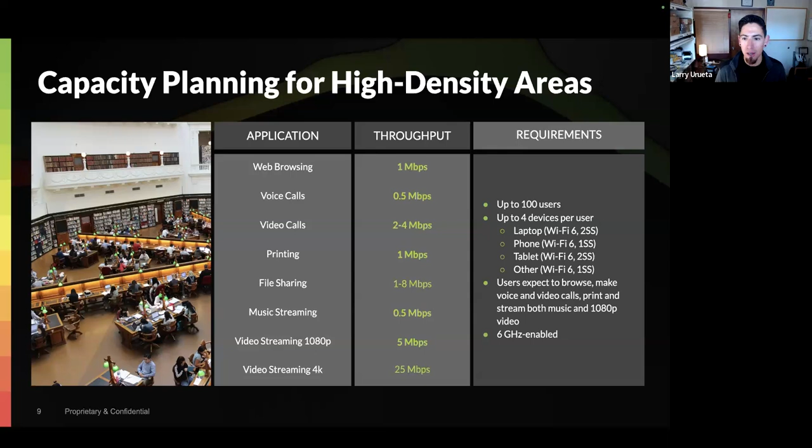Yeah, absolutely. I mean, you kind of already mentioned lecture halls. We see an influx during exam periods or during sessions and classes. Classrooms fill up with people, wireless devices. Maybe they're not always depending on the wireless for instruction, but as soon as that period is over, we also see the influx of all those devices disperse. It's interesting to see the wide variety of laptops, tablets, cellular phones, smartphones in some of those environments.

Absolutely. So with that Ekahau solution, it's definitely important to account for this. It's not just about the coverage. Capacity is going to be key, around capacity considerations, channel availability, device capabilities, and a number of different things that this application, Ekahau AI Pro, will allow you to account for, so that you can really simulate that environment and come up with a good design, making the best decisions based off that environment.

It allows you to be strategic, versus an alternative of just looking at a floor plan, looking at a map, and placing APs on that map. There's a lot more to it.

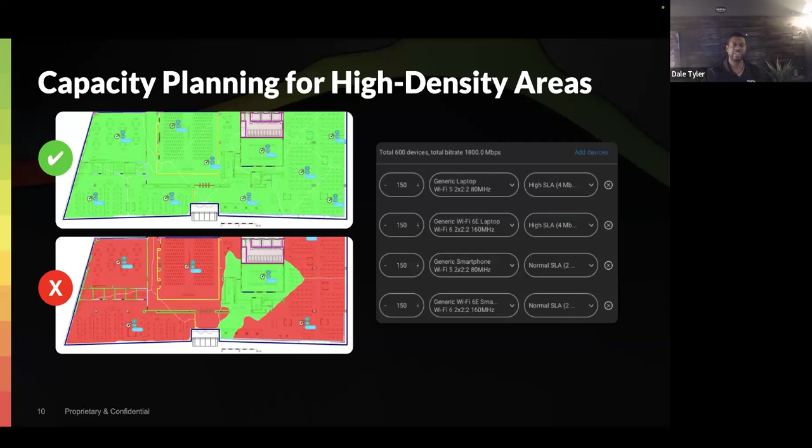Now, what we touched upon briefly is the many different types of devices. While it would be nice to have a set type of device capabilities up to date -- in this case we see many Apple devices, that'd be relatively easy to manage -- but the reality is not the case, especially in these higher ed environments. You have old Blackberries, old laptops, devices that might not be up to the latest standard, might not even be Wi-Fi 5 capable. So you have it all over the place, but you really can't discriminate and say, okay, this device is not allowed on the network. I mean, potentially you can, but you might have a lot of unhappy and disgruntled individuals when that applies.

So that's one of the things you can definitely count on in these environments -- the inconsistency of Wi-Fi client devices. So with that, what we want to do next is take a look.

We'll do a brief demo on the Ekahau AI Pro application. If you haven't seen it, this will be a good opportunity to see what it looks like, some of the considerations, how you go about accounting for some of these different requirements. So I am going to briefly share my screen here.

We will move this over and we'll take a look at Ekahau AI Pro.

So, I figured this was a good opportunity for me to kind of go back to school, revisit my college. I went to the University of Pittsburgh. This is actually the dorm that I stayed in at the time. Wi-Fi was not around in the dorms. So it's really interesting to go back and even see which room probably was mine, and think about some of these considerations, but more so from a Wi-Fi perspective today.

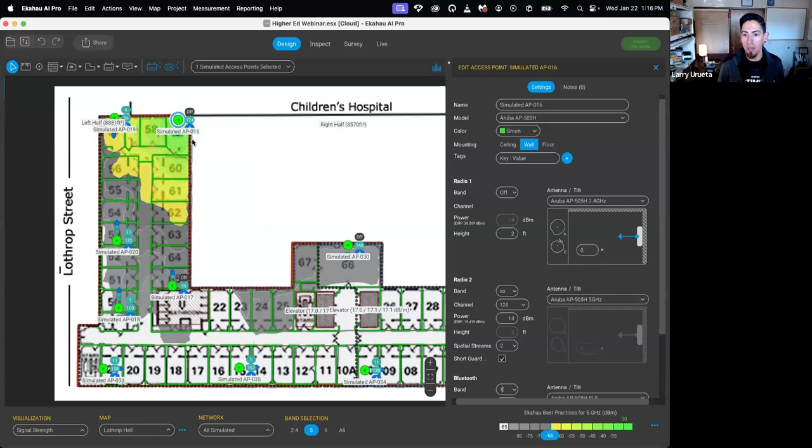Larry, are these pretty common these days that you see in dorm locations? Absolutely. Yeah, the ability for them to provide an Ethernet connection as well as a wireless connection is pretty valuable for the students. It gives them options. So we do see those in our residential dorms. Yep, and that's what I chose to go with for this particular location.

Now, obviously, we altogether have over 4,500 different AP antenna combinations to choose from. Maybe you want to go with the omnidirectional internal antenna APs, ceiling mounted -- those are options as well. So you get a chance to play around, simulate that environment, and understand what works best for your particular needs and use cases. Now, with this particular floor plan, of course, I scaled it.

Very simple to do. You take our scale tool, take a known distance, typically the longer the better. Then you left click and drag across that known distance and type in a corresponding value. From there, it's scaled for you thereafter.

So we have our scaling in place. Next thing you typically want to do is define your requirement areas, and this is going to be key. You do that using our area tool. In this case, we go to requirement areas, and actually, to help better visualize things, I'm just going to turn off our visualizations.

So in this case, you see I have a red half and a blue half. So what I've done was create two requirement areas across this floor. You could definitely do it as one, but you get a little more granular if you break it down. So with this, let's look at some of the considerations around an area.

I'm going to click along our area right here and choose edit area. Here's where you give it a name. I just called it generically left half, and I gave it a color of red. You have some options in here, really helpful for distinguishing between requirement areas so you can quickly see this is one area, this is another. It allows you to quickly see where the areas separate and such.

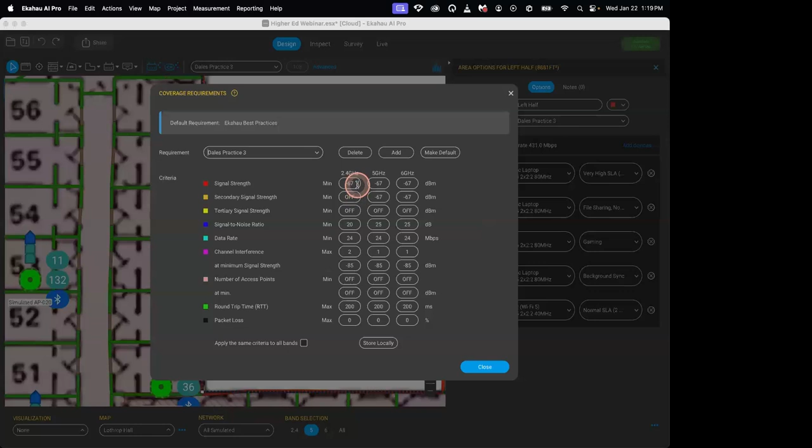So not a problem if you have Wi-Fi 6E or Wi-Fi 7 in scope, you can account for that as well. But this is where we start talking about capacity considerations: the number of devices, device type and capabilities, and the applications. You'll notice we have a column for each one of those.

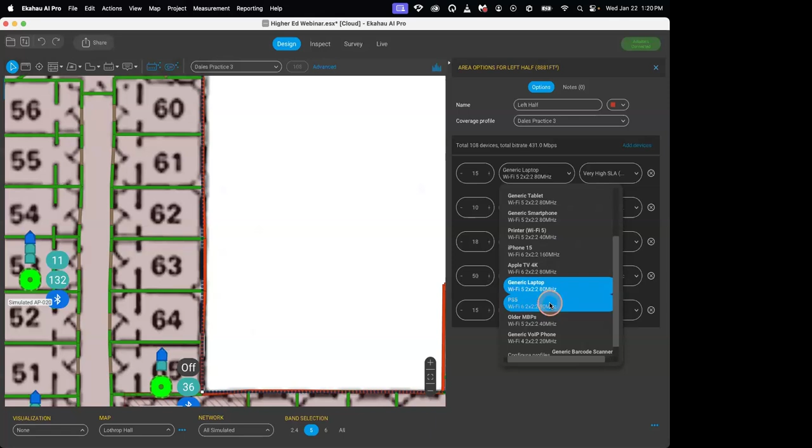Out of the box, we do have a number of generic items or devices for you — generic smartphone, tablet, VoIP phone — but also some outside of the generic, which are what I've created. Oftentimes it's a best practice to really simulate that environment as precisely as possible, so I've thrown in some Wi-Fi printers here. We have iPhone 15, iPhone 16, PS5 — you can't forget that — Apple TV. So a number of different devices and then the type of application.

Ultimately, when we assess or try to gauge what our airtime utilization is expected to look like, or capacity health, these are where you feed in those key criteria and values.

So now we could turn back on a visualization of primary signal strength, and we'll just go up here. Altogether, we do have 26 different heat map visualizations. This is going to give you a good idea how that Wi-Fi environment looks, whether it's these simulated access points or later, if you survey your measured APs.

So we go here. Now, again, we do have some areas where primary signal strength is not meeting our requirements, so we might want to address those.

So some of these simulated access points, again, we'll dive in and look at how these are currently configured right now, at about 2 feet height from the floor. These are plugged in, so vertically aligned. So we see that orientation right there.

But there are some options depending on the AP model. Maybe you want to specify ceiling mounted, wall mounted, floor mounted, or for some of those, maybe you want to account for a down tilt — often the case where you might be deploying directional antennas, external directional antennas and such. So you can account for down tilt, tweaking your transmit power levels, and channels. So a number of things you could do with these simulated access points.

Now, for this model that I chose, I'm just going to — let's just do it this way. So let's start placing some more of these.

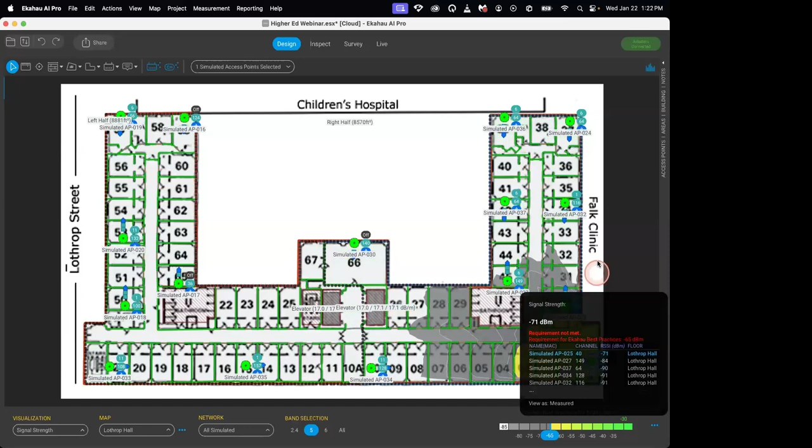Now by default this one is facing downwards because I copied that one. But now what we can do is take this AP antenna and move it back here. Let's suppose this is a wall jack AP, and we want to aim and direct it closer to, there we go, aim it that way, because we wanted to point down more into the rooms, not so much the hallway area. So we can aim and direct that.

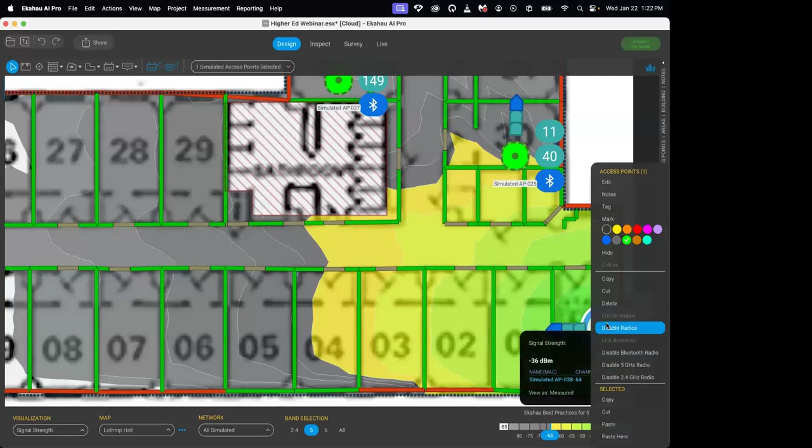Now I'll just continue this approach a little bit. We'll copy it, zoom out a little bit. Well, I have one right there, so we might be good for right there. Maybe we paste right here.

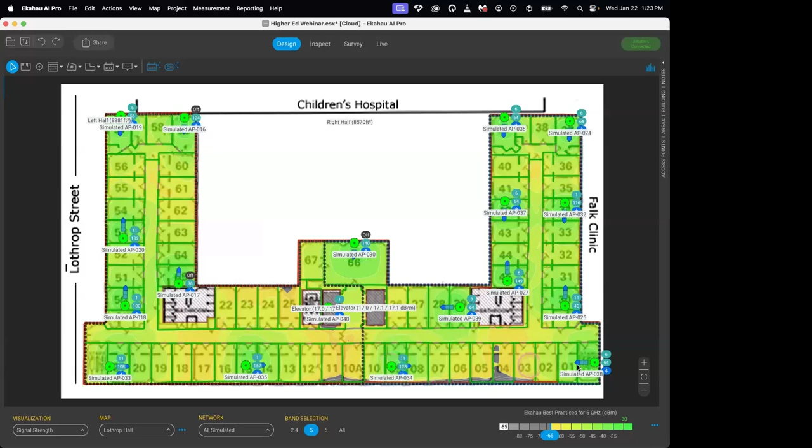And we take this one that already has the proper orientation I'm looking for, so we just copy right there and paste right here. As we look throughout coverage now, let's see, pretty much we have sufficient coverage. Maybe we want to consider moving this one over there from a planning perspective to address that gap, or maybe we just add another one. But you get the idea.

Now that these are in place, okay, these APs I did a copy and paste on them. So one of the things we can look at is network health. Network health is going to give you a very simple pass-fail indication showing you what areas meet your requirements entirely versus those that have at least one criteria that fails. So in this case we see some green, but we see a lot of red.

Now what we can do is take advantage of network issues. That's going to show us why our requirements aren't being met. So we do have these areas that are pink, where channel interference isn't meeting our requirements, but also we have these areas where secondary signal strength is not meeting our requirements.

Now if we want to take a look at the capacity health, we can go right here, and this is going to give us another legend we can take a look at. Now in this case, why is my capacity health showing that it is okay? Let me see. But actually, yeah, my channels do look different here. So maybe you are okay from a capacity health perspective.

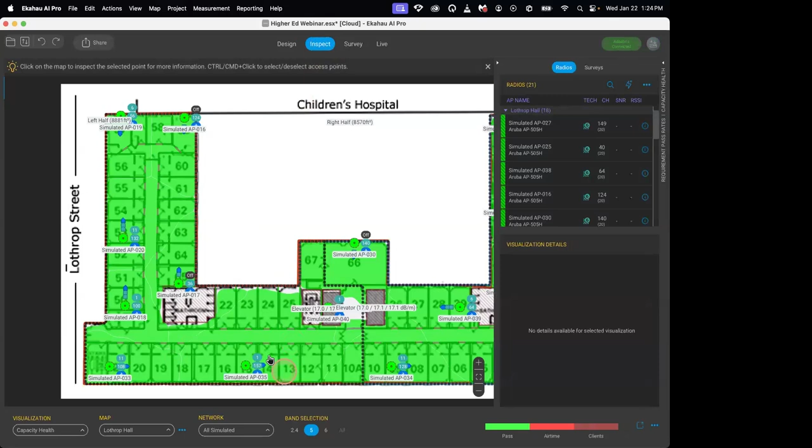But one of the things we can do is go to the inspect workspace and do some inspection. So this allows us to click throughout. So yeah, we do see confirmed in here, visualization details, airtime 14% over here, 18 clients, 16 clients. So again, it comes down to the number of devices, device type capabilities, and the applications that you have in place.

Now this is a manual approach that I took as far as placing the access points, but we also have a feature called AI Auto Planner. So maybe you want a little bit of assistance as far as placing these APs for you, with the ability to thereafter relocate those APs, make adjustments, add, remove some. You do have that option and capability also.

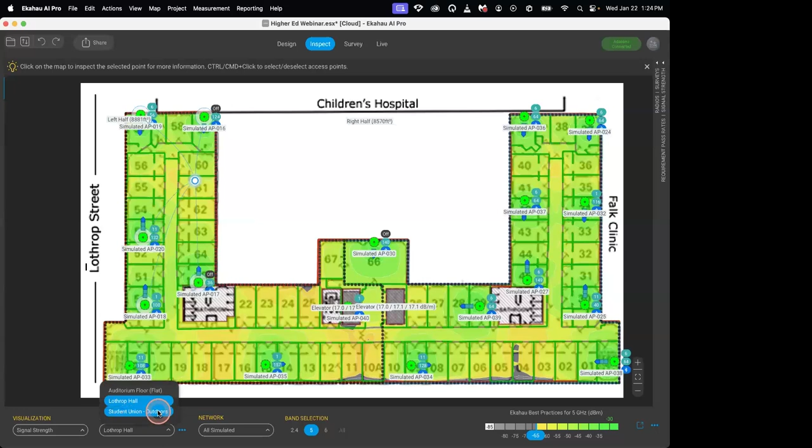So these are some of the basics within this application in the dorm type of environment or floor plan, but we also have an outdoor location. So this is actually the student union of where I used to go to school, University of Pittsburgh. Maybe the lawn is an area of interest where you want to ensure coverage.

So in this case I used a Google map. I actually went to Google Earth and brought this in, but we also have an Ekahau survey application that has an Apple Maps integration that will bring this floor plan or map in for you already scaled. There's even a GPS-assisted survey option that's really good for outdoors, which I'll mention again a little bit later.

You'll notice in this case you can account for the different attenuation areas, so we're not talking just about things found inside a building, but also outside a building. In this case, some of the trees and foliage out there, you can account for that, along with your APs mounted at various heights and such. In this case, we are using some external directional antennas.

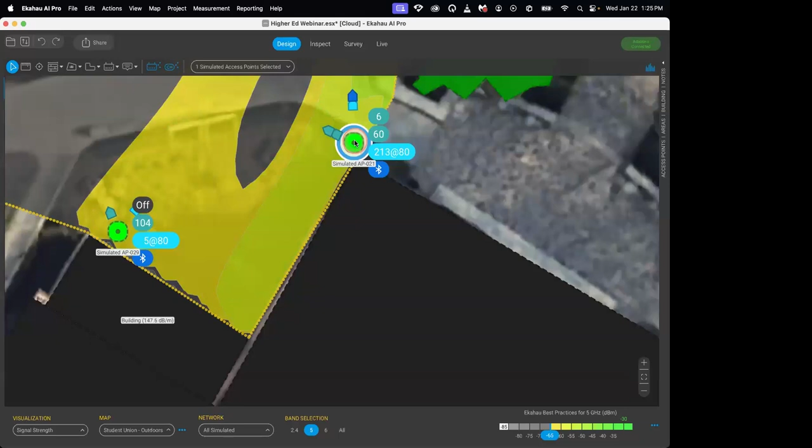You'll notice that once I click on this particular AP, we see the coverage associated with this based on this particular external antenna and its properties. Alongside this AP that's represented, we see the channels across the 3 frequency bands - 2.4, 5, 6 gigahertz. So this is a 6 gigahertz capable access point.

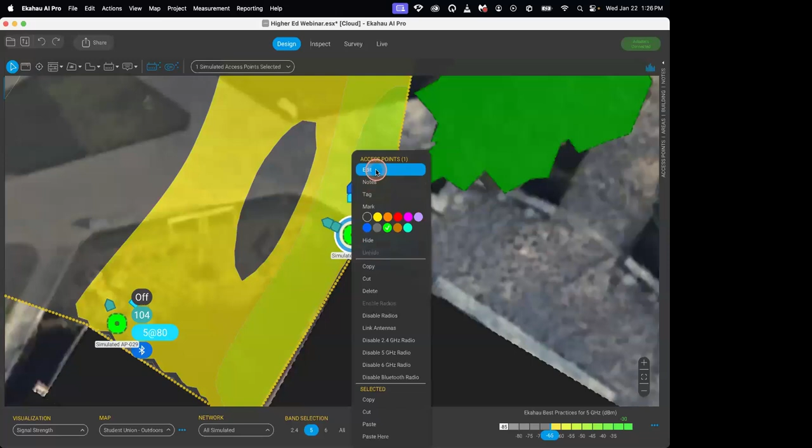We have the 6 gigahertz heat map visualization we could take a look at, you see right here. But when we choose edit on this one, you'll notice this AP is mounted a little bit higher at 20 feet high, so you can specify various heights. The down tilt is currently at negative 47 degrees. Maybe we want to see how this looks at minus 30 degree down tilt, and if there were any significant changes, you can account for that. Also, how you direct or aim that particular antenna or antennas, you do have that capability as well within this particular application.

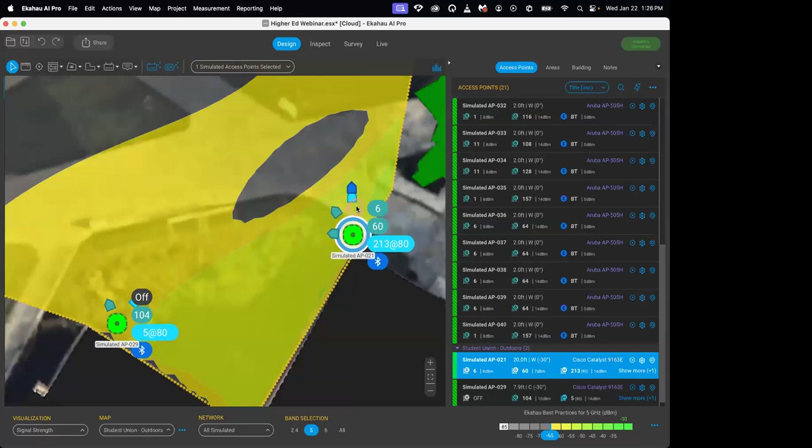So a number of things that you can do. And again, you can always go to the inspect workspace and take a look at a number of other things here as well. So all types of environments you can simulate that are actually reflective of your true environment.

So what I want to do next is we will bring some of my slides back up in just a moment.

So we looked at AI Pro more so from a predictive planning and design perspective, but oftentimes it is going to be very important to do validations as well. Maybe it is a new building and the access points have been installed based on your plan that you've passed over to the installation team.

So at that point, when we talk about validation, where access points are in place, this is where our measurement device known as the Sidekick 2 comes into play. This is going to ensure the accuracy of your measurements, largely thanks to the 9 custom wideband antennas built into it, giving you omnidirectional measurement. So if you're at a location, you'll be able to get readings from floors all around you, above, below, even multiple floors down or above.

Also, 4 tri-band Wi-Fi radios, so when it comes to measurements, rest assured you can account for 2.4, 5, as well as 6 gigahertz frequency bands. And with the 4 of these working in unison, you can get surveys done in a fraction of the time compared to what it used to be before.

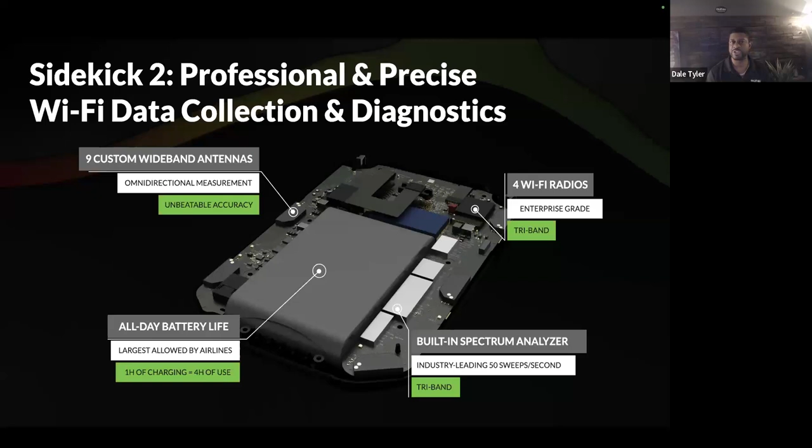And lastly, it does have its own battery. For some of you that might have been doing surveys for quite a while, it used to be the case where you had multiple USB dongles plugged into your laptop, draining your battery relatively quickly, so you'd almost be spending just as much time recharging your laptop as you would surveying. Not the case here - it does have its own battery built in with a quick charge feature. So in the event that it's dead completely or relatively drained, with 1 hour of recharging it, you get an additional 4 hours of usage out of it.

So a little bit more about the Sidekick 2 - how do you use it? The Sidekick 2 is a wearable device. You plug it into your laptop as an option, but many nowadays prefer to plug it into their mobile device, their phone or tablet, as long as it's Android or iOS based, not a problem. Single USB-C connection. It has a strap you wear across your torso so it sits hands-free to the side of your hips or waist.

Now we have an application called Ekahau Survey. This is one that runs on your Android and iOS devices. So simply just plug your Sidekick into your phone or tablet as mentioned, and you have a few different survey options. You have the more traditional stop and go and continuous, but on the iOS version, you have the autopilot as well - really simplifies the survey process.

You just do an initial calibration, really just indicating 2 points of where you started, where you've walked. Once thereafter, you're just walking, and locations are automatically pinpointed on there.

More recently, we added Just Go. Larry, have you had a chance to use Just Go? Oh yeah, I tried it out as soon as you guys released it. I actually bought a tablet just for that simple purpose, and it was pretty neat. So yeah, if you have an iOS device with the LiDAR sensor built into it, you can take advantage of this.

So if you don't have a floor plan, or the one you have is inaccurate or outdated, not a problem. Just Go Survey is going to help you with that. We'll take a look and give you a better sense of how that looks and how that works.

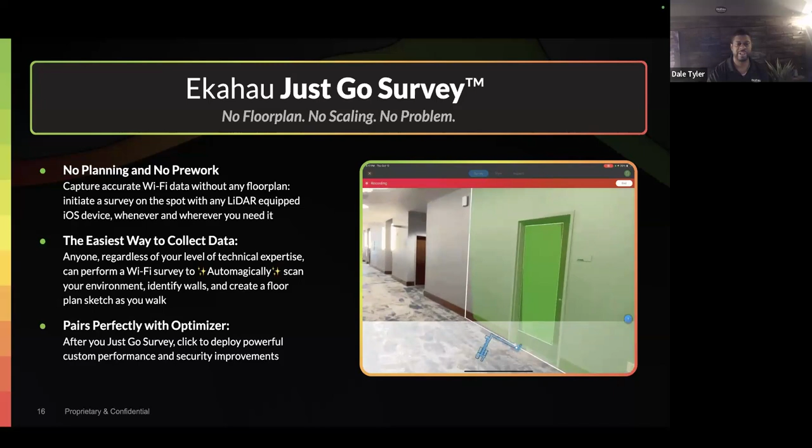So again, we talked about support for outdoor campus Wi-Fi coverage, and again we have a very simple Apple Maps integration. You could do a GPS assisted survey, and you can also take advantage of any other options available in there. You can even do a hybrid of any of the different survey methods in a single project, so you'll really get a feel of what method works best for you based on your particular project and use case.

Now, also within that application, from a security perspective, very important—the survey application will quickly allow you to see where rogue access points are located and their area or impact of coverage. Maybe you just want to get an idea of how many users in your environment are activating their hotspots—could this be contributing to poor performance on some of your networks, especially on 2.4 gigahertz. So from a security perspective there, but also interferers that I mentioned—you conduct a survey, you might want to see where those interferers are located in relation to that floor plan. This application will show you that as well.

You'll be able to tap on the icon or the image associated with that interferer and get interferer details. So it makes it really convenient. But also, if you're in charge of managing Wi-Fi networks for your organization, your university, you get the ability to quickly see where weak security is configured. Oftentimes this is a gateway or entrance to vulnerabilities into your network. It's very common to have wired printers that have wireless capability, and an open SSID leads to an easy path into the wired network. So this also gives you quick insight as to where those AP radios are that have weak security configured.

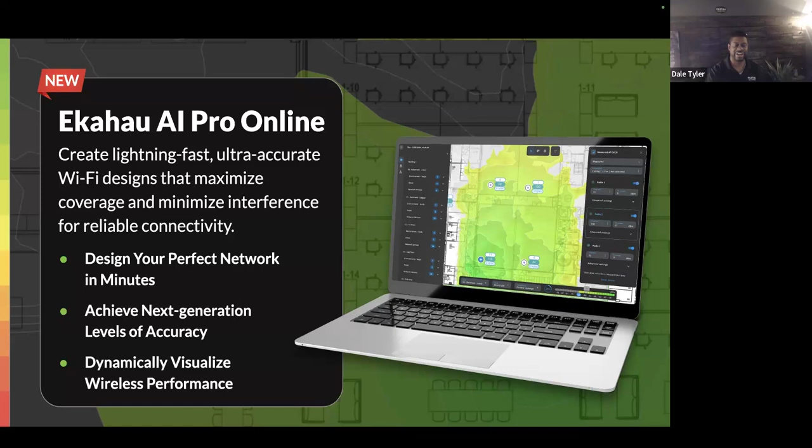With that, I just want to quickly talk about AI Pro Online. This is one of our newest innovations, newest features. It's a new way that you can go about doing your refresh, but also simulation and optimization of your environments. And now you can even do your predictive design and planning in AI Pro Online. It's a web-based application; simply log into your Ekahau cloud, and there's an option to access AI Pro Online.

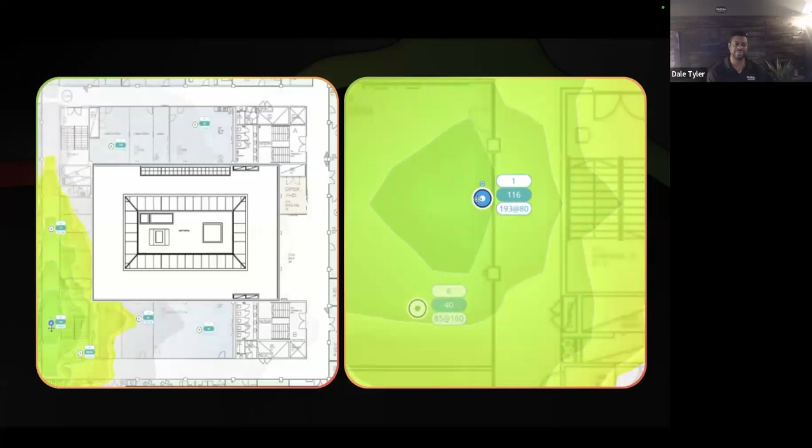Essentially, here's the workflow: you walk the location with your Sidekick 2, so you conduct a survey. You save that project to the Ekahau cloud, and now bring it into AI Pro Online. Thereafter, you can actually simulate changes in that measured environment. So maybe you want to see if we were to reposition this particular access point, what's that going to look like? If we were to tweak the transmit power levels, adjust the channels, what's that going to look like? This is really good for simulating these things before going ahead and making changes in production. It allows you to be strategic with it.

Now, another thing - this is brand new. As I mentioned, you now have the ability to do predictive designs in AI Pro Online, bring in your floor plan. There's even some nice auto wall drawing opportunities in there, options and features, so you don't have to spend so much time drawing the walls. But maybe you want to take a look at some of these walls, attenuation areas from a 3D perspective - this is now available, this is a capability. I know there has been a lot of demand for a number of years to see some 3D visualization, so you do have that available in AI Pro Online.

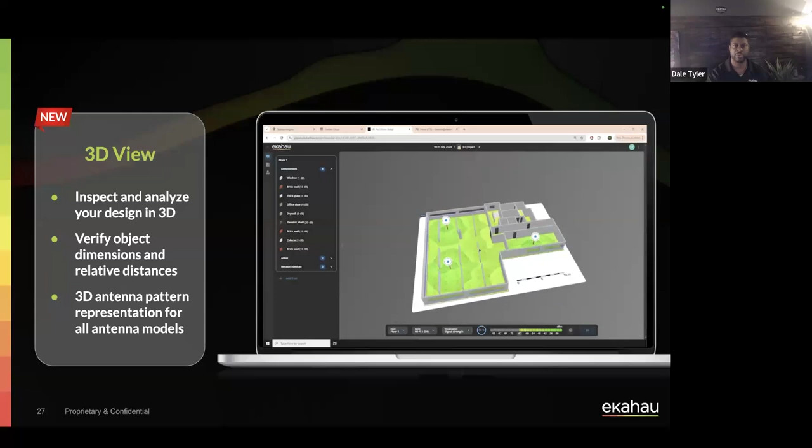Today, but also coming is going to be some extended modeling capabilities. Larry, I think on our Wi-Fi day there was a stadium that you actually covered that you did - it would have been nice probably to have some of this extended modeling capabilities around for that, right? Oh yeah.

And don't worry, there's still an opportunity. We still haven't completed that project yet. But I saw the slide, got excited, been looking forward to it for some time now. So hoping for some good news soon.

Yeah, nice. So on these campuses we have arenas in play, we have stadiums in play. These extended modeling capabilities are really going to help you visualize things from not only a 3D perspective, but seeing things from sloped elevations. You have ramps, you have stairwells and such. So this is going to be really nice, you can look at things from an inclined perspective. This is coming very soon to the AI Pro application, AI Pro Online.

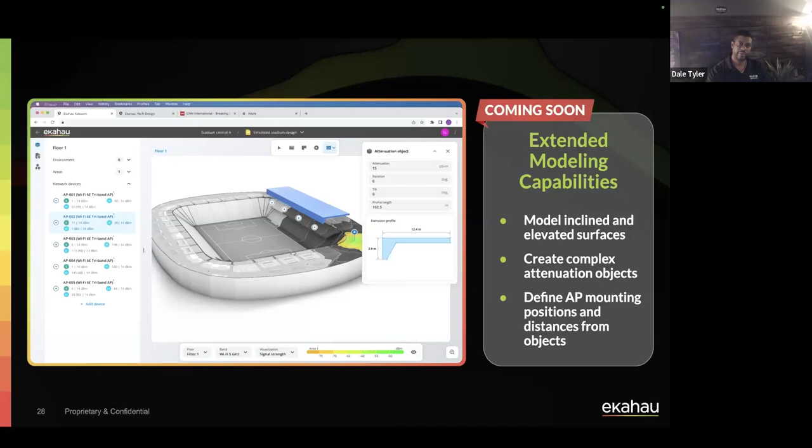And with that, we recently brought in the speed test integration. Many of you might already be familiar with the speed test application as a standalone app. Well, now you can do your speed test and run those in conjunction with spectrum analysis. So maybe you can see if there's an interferer that could be impacting the Wi-Fi performance, or maybe some channel utilization or saturation going on. Is there a correlation? With the speed test integration, you now have that capability also in the Analyzer application. And soon to come, you'll start to see more integrations from some of our sister brands under Ookla.